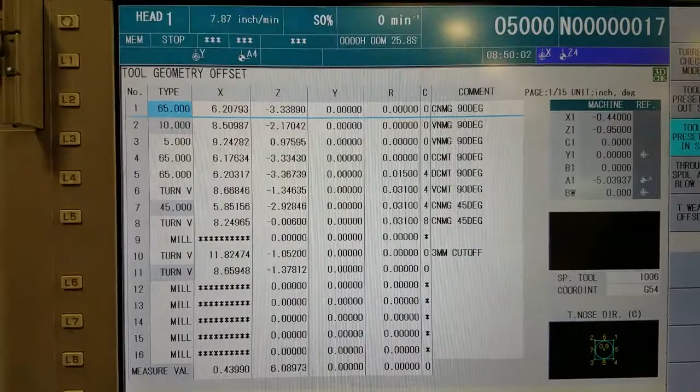Alright, in this video we're going to discuss the tool offset page on our NTX 1000SZ. I'm going to split this up into two videos, one handling the head 1 offsets and one handling the head 2. The way you toggle between the two of them is right here, head 1 or head 2. You'll always want to make sure when making offset adjustments that you're on the right head.

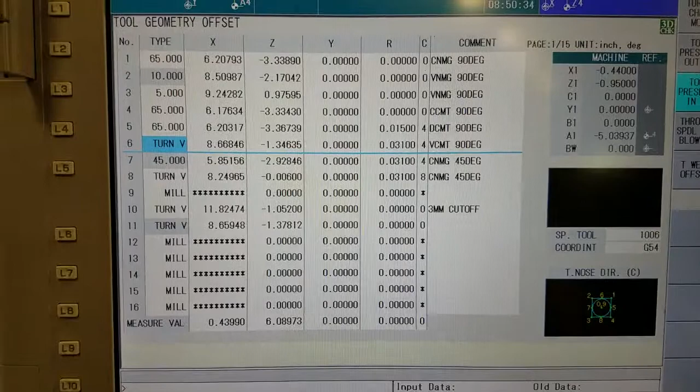So first let's look at a turning tool, number 6 here. Number 6 is being used at B0, so there's no angle call out. You'll see all these others have an angle. That's where it's actually being used at in the program. The number here tells us which tool number we're using. X here on a turning tool is going to be measured in diameter.

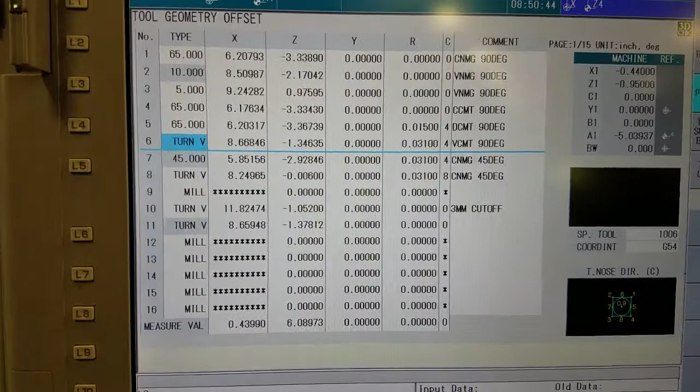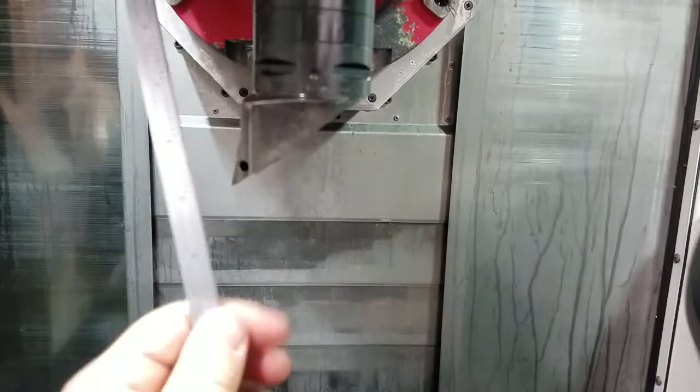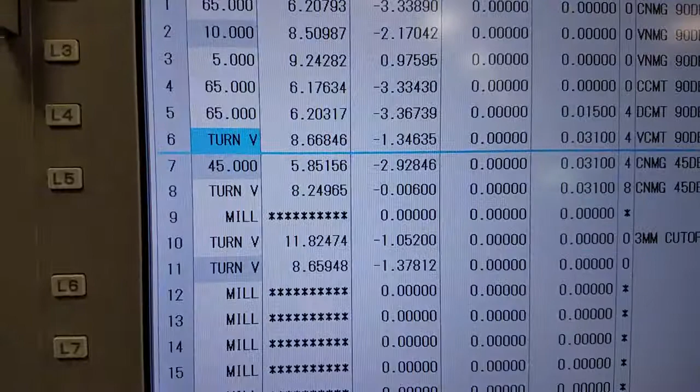Now the way that looks is it's the distance from here, this gauge line, to the tip of the tool. So if we look at a steel rule and we just eyeball that, we're right around 4.3 inches to there. We look at our offset page and it says 8.6, so that's double. Now the Z offset, that's going to be the distance from the center of the spindle to the tool tip right there.

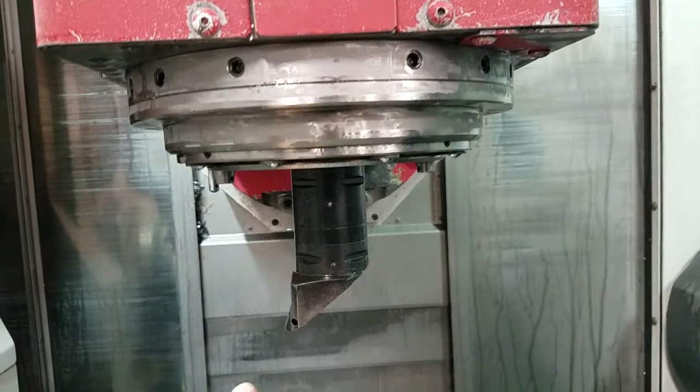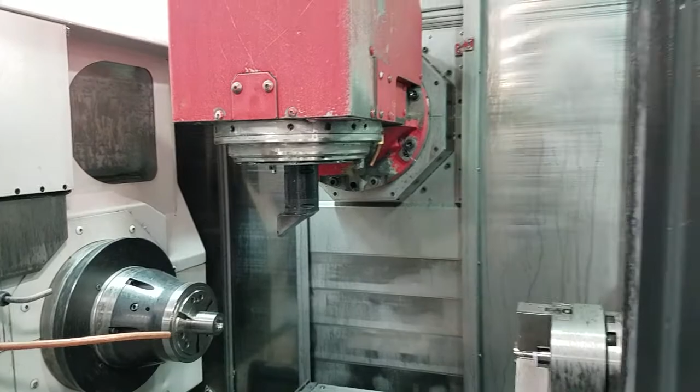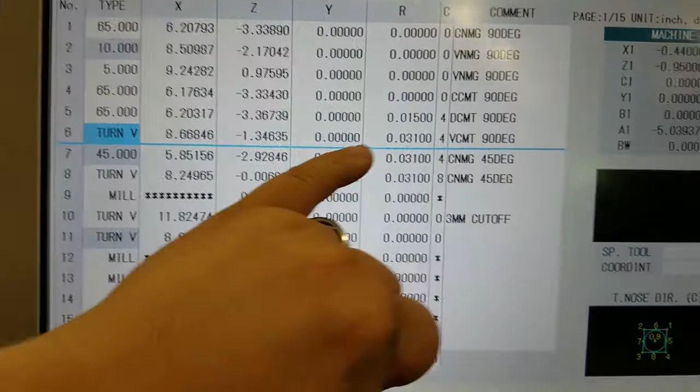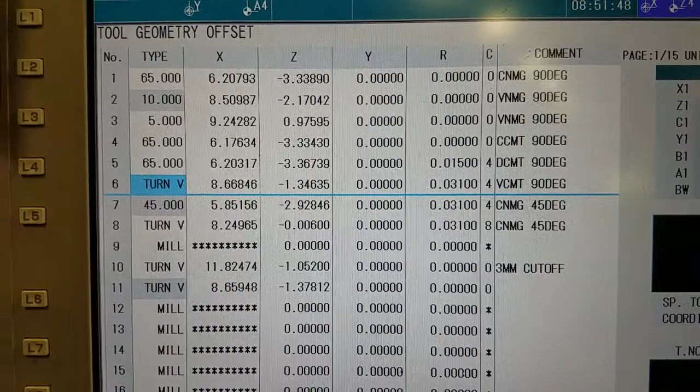The Y offset is going to be an adjustment forward or back should you need to remove a nib off the end of your part. The R column tells us the size radius on that insert. The C column tells us the orientation. There's a handy little graph there. And then of course the comment column is a handy little tool on this particular control where you can put in your own comment. We like to use it to tell us what's in there in the carousel.

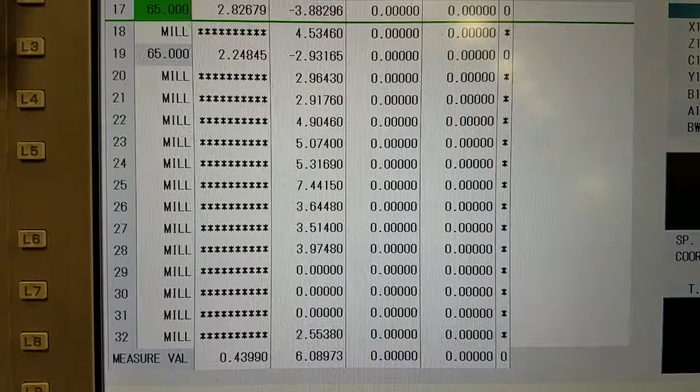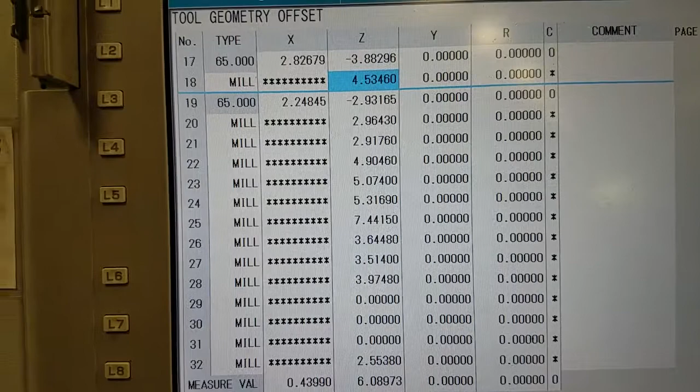Now if we look at a milling tool, you'll see all the milling tools written down there. You'll notice there's no X column. That's because the machine only needs to know the length of that tool. Now that length is measured linearly. So that means it's just a straight measurement from this shoulder to the end of the tool, and that's the number that goes in there.

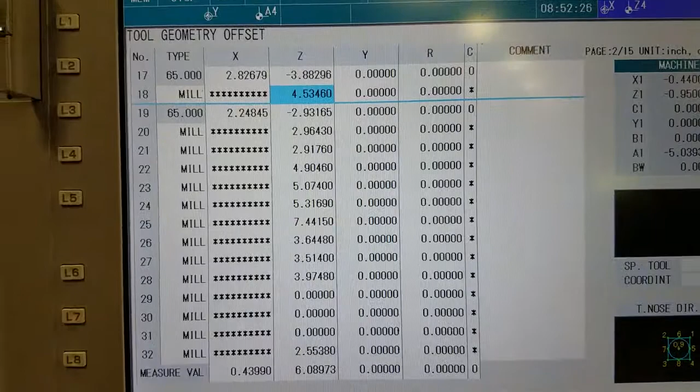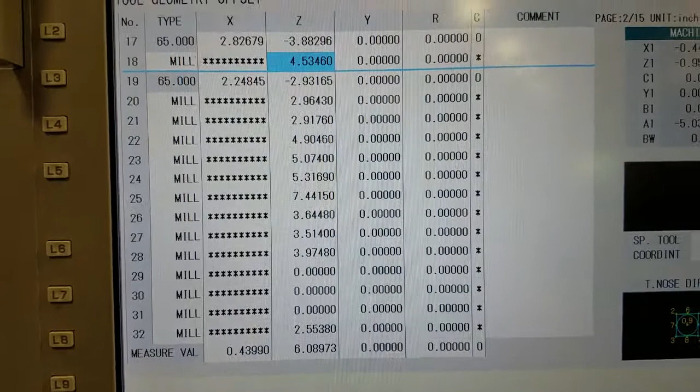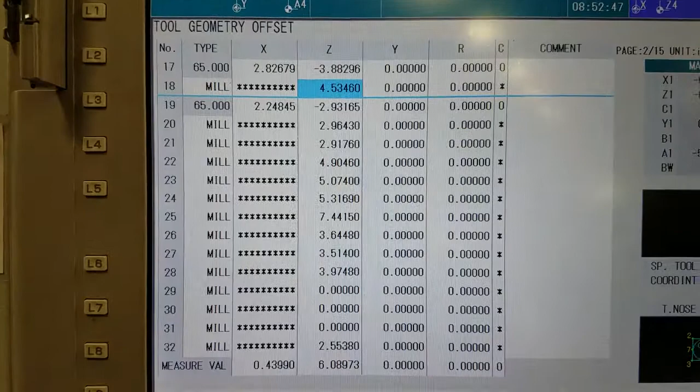Again, Y offset is the same. You would adjust that if you wanted to put a hole on center, but really that should probably be done in your work coordinates. The R is the radius of the tool. Now in our geometry that should always be set to 0 because we program that out of it on our CAD system. And you'll notice the C is not usable because the machine knows that a mill tool can only be orientated one direction.

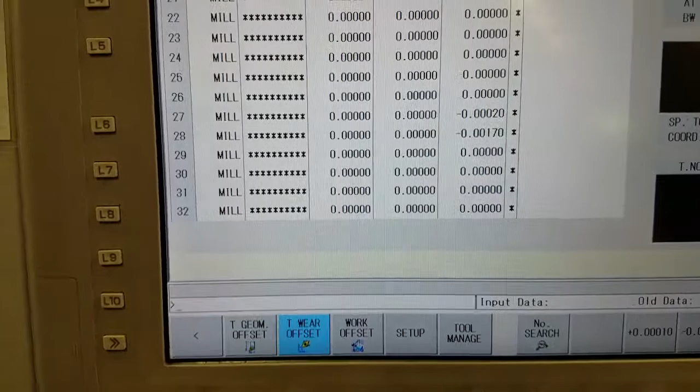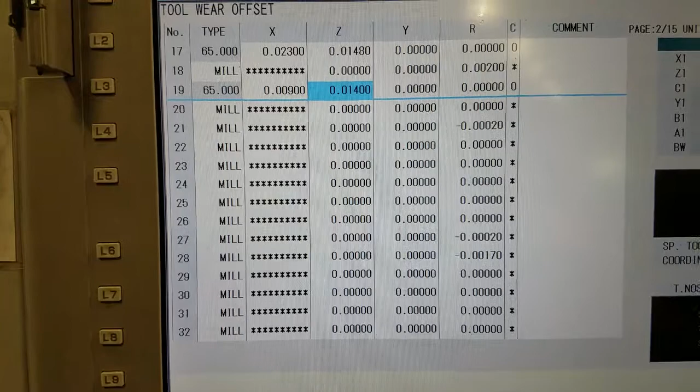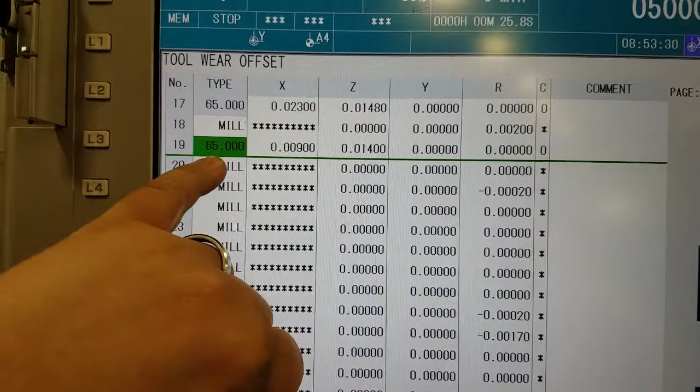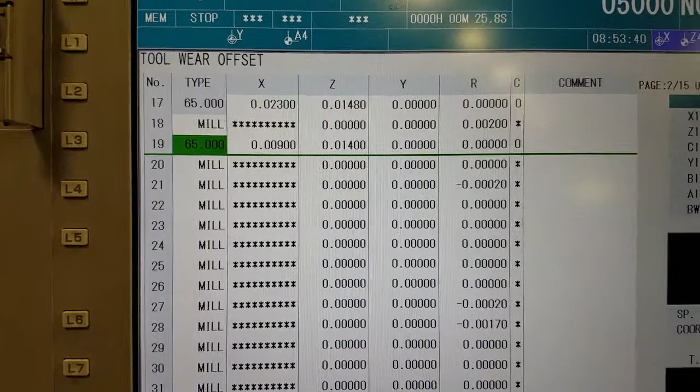Now let's look at our tool wear offsets. Again, our wear is meant for just minor adjustments. The geometry is where it's physically located in the machine. Wear is just for small, minute offset adjustments. One thing to note when making adjustments to a turning tool, you'll want to make sure that the angle there matches what you're actually using in the program. If it hasn't been called up yet, that won't get adjusted. You need to wait till the tool's been called up and that angle gets put in there to make your adjustments.

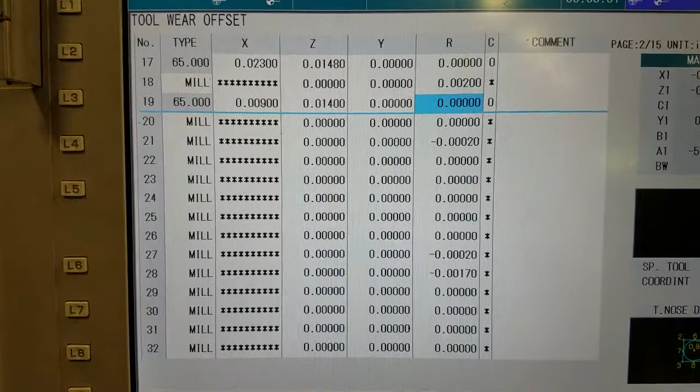Also, another thing to note on milling tools is that this is a radius call out. So if you're circle interpolating a hole and you need to make it a thou bigger, you're really only going to adjust that 5 tenths.

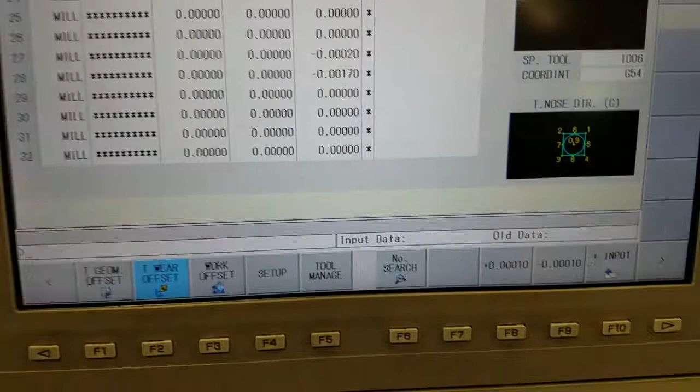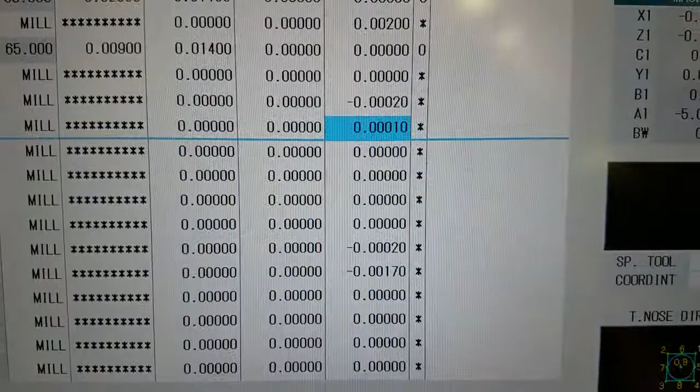One other thing to point out is there are these handy little buttons down here that allow us to make quick adjustments by 1/10 with just one button. You can see it'll go up by 1/10 every time I press that, or go down 1/10 if I press the other. The other handy thing is if you make a wrong adjustment, you can hit this undo button and it'll ask you this little question: do you want to recover the previous data? You can hit execute.